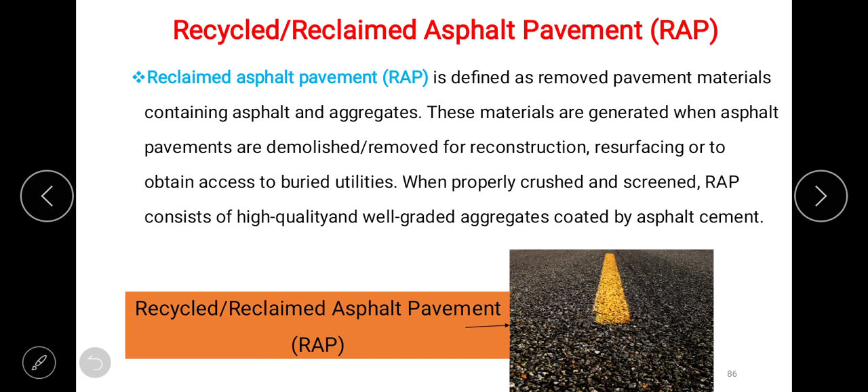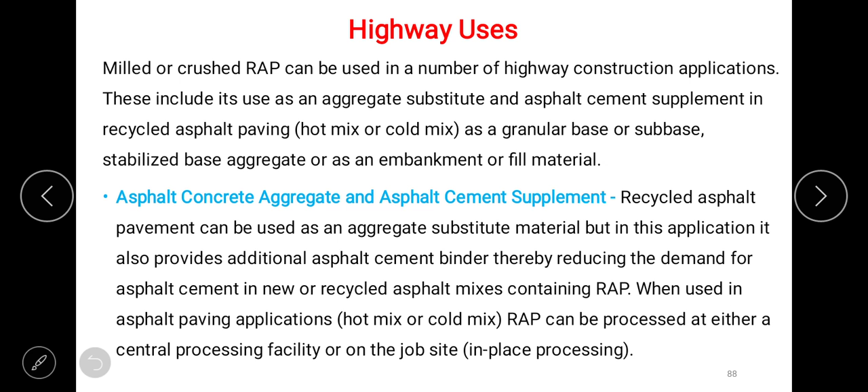In the last class, we have studied and understood what is RAP, recycled or reclaimed asphalt pavement. This is the one wherein the waste materials, that is bituminous concrete pavement or cement concrete pavement, when it comes for more maintenance, the whole slab is removed, that is demolished. The waste materials can also be reused in the construction, and how it is managed with current management options, recycling, disposal, and different highway uses, we have observed in the last class.

Today in this class we will see furthermore content. First of all, processing requirements. Hot mix asphalt, that is central processing facility. Recycled hot mix is normally produced at a central RAP processing facility which usually contains crushers, screening units, belt conveyors to convey the material, and stackers.

After it is crushed, then it should be stacked in the form of a heap. So if this pandemic disease comes to an end, then definitely you will be taken to a crushing plant, bituminous plant, etc. for site visit.

There, all processing steps, how it is processed, what are jaw crushers, primary crushers, secondary crushers, tertiary crushers, in order to get small sizes of aggregate for road construction, it will be possible for you to watch during site visit. Let us hope for the best. We will be getting that opportunity by the grace of Almighty God. So always we should think positive.

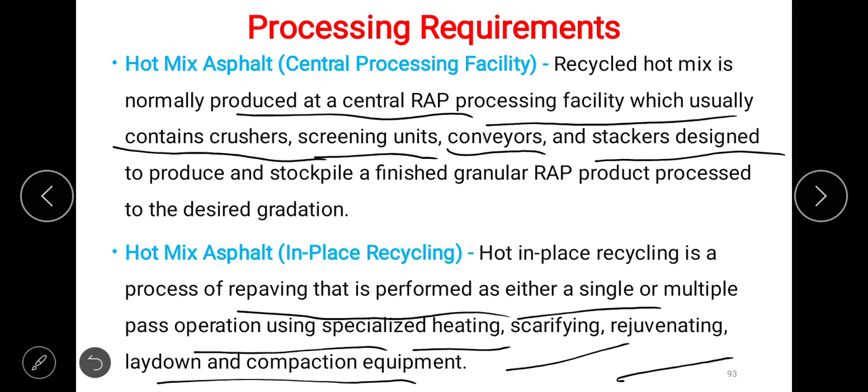Cold mix asphalt, central processing facility. The RAP processing requirements for cold mix recycling are similar to those for recycled hot mix, except that the graded RAP product is incorporated into cold mix asphalt paving mixtures as an aggregate substitute.

So instead of directly using the produced aggregates, we are going for waste material. After it is crushed in the central unit plant, it will be graded, means gradation is done, and then this graded RAP product is used. Thereby it can be considered as sustainable development. Sustainable means we can save or we can use this natural material for a longer period. That is known as sustainable development. You have studied in FE, BCE also.

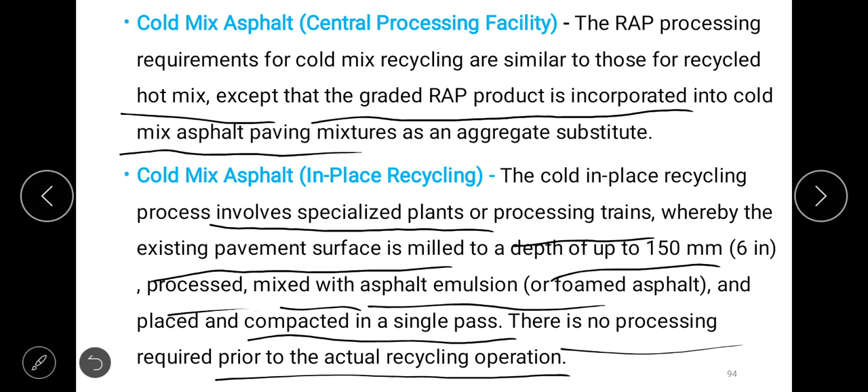Now, cold mix asphalt in place recycling. The cold in place recycling process involves specialized plants or processing trains whereby the existing pavement surface is milled to a depth up to 150 mm, that is 6 inches. It is removed, processed, mixed with asphalt emulsion or foamed asphalt and placed and compacted in a single pass. There is no processing required prior to the actual recycling operation.

Clear? Now, granular base aggregate. To produce a granular base or sub-base aggregate, RAP must be crushed. The removed or demolished pavement debris should be crushed first, and then it should be screened using different sieves. A set of sieves is established at the plant and blended with conventional granular aggregate or sometimes reclaimed concrete material.

Stabilized base aggregate. To produce a stabilized base or sub-base aggregate, RAP must also be crushed, screened, same procedure, then blended with one or more stabilization reagents so that the blended material with or when compacted will again gain the strength. Stabilized reagents like fly ash, brickbats, some other materials which could be used as stabilized agent which will gain good strength.

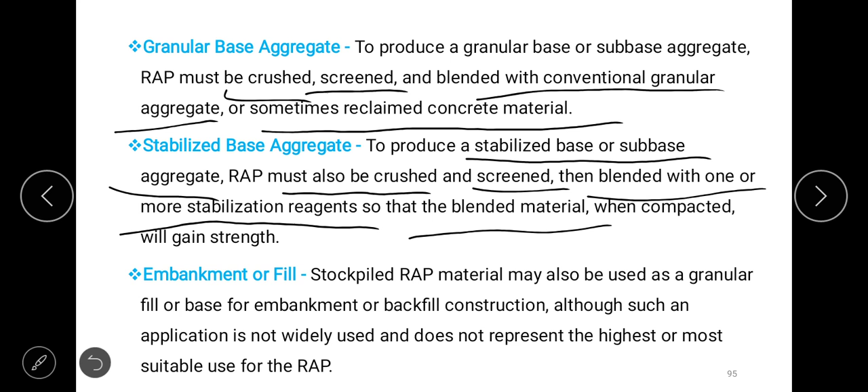Embankment or fill. Stockpiled RAP material may also be used as a granular fill or base for embankment or backfill construction. Although such an application is not widely being used and does not represent the highest or most suitable use for the RAP. More popularly it might not have been used, but nowadays, so as to conserve the natural resources, so as to show the sustainable development in each and every sector. You take plastic industry, whatever the waste of plastic that will be collected and recycled so as to make it reuse.

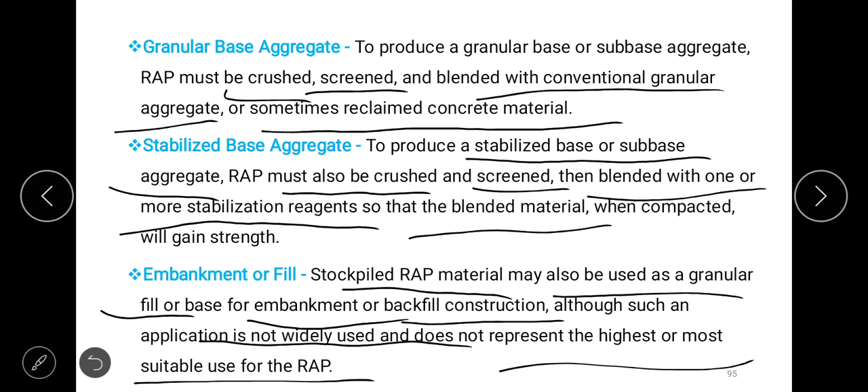Even plastics are used in road construction also. That is a waste material that can be used effectively when it is mixed with hot bitumen. Properties of bitumen material is enhanced, and when it is used in road construction, definitely it will become sustainable. This is reclaimed asphalt.

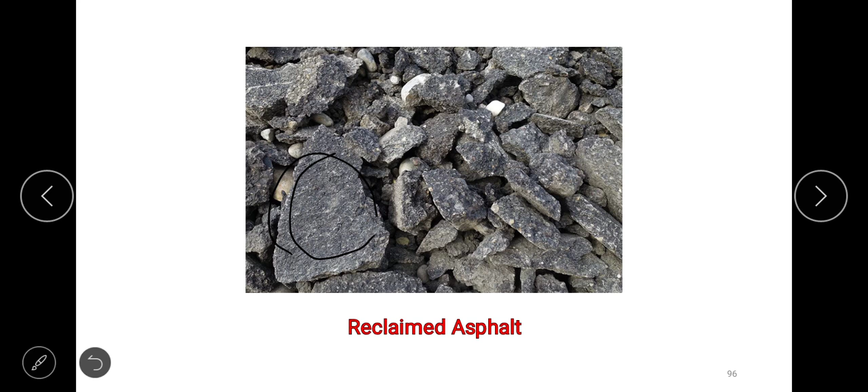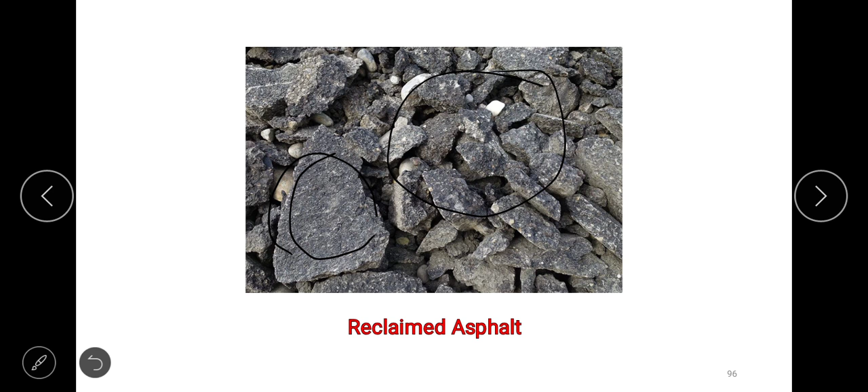How the debris is collected and shown in this photograph, you can understand. This is the pavement material which is removed from the location. Then these will be taken to the crushing plant or centralized plant as we have explained in the earlier slides, and it will be sieved through to get different sizes of aggregates for different purposes. Materials. Just let me zoom it.

Physical properties. The properties of RAP are largely dependent on the properties of the constituent materials and the type of asphalt concrete mix, that is wearing surface, binder course, etc. Depending upon different courses wherein this RAP material is to be used, the properties are also to be desirable.

Both milling and crushing can cause some aggregate degradation. The gradation of milled RAP is generally finer and more dense than that of the virgin aggregates. Crushing does not cause as much degradation as milling. Consequently, the gradation of crushed RAP is generally not as fine as milled RAP, but finer than virgin aggregates crushed with the same type of equipment.

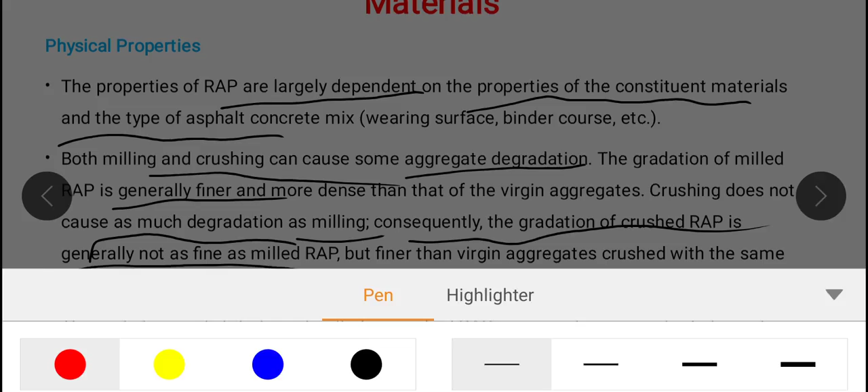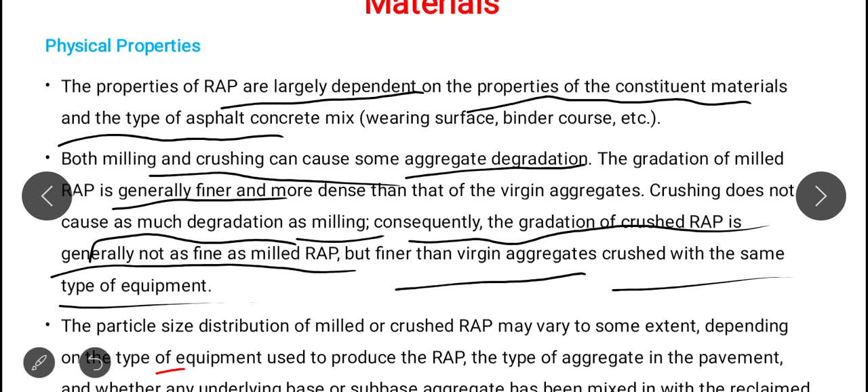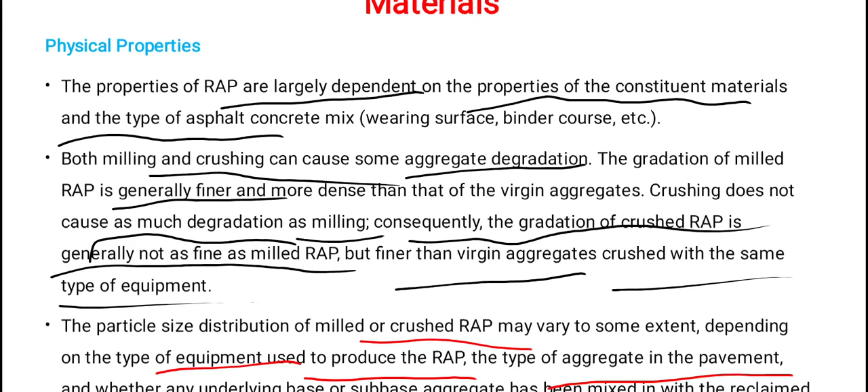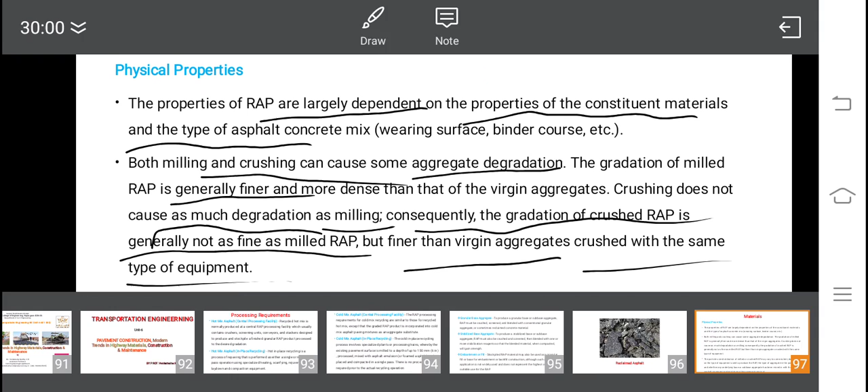The particle size distribution of milled or crushed RAP may vary to some extent depending on the type of equipment used to produce the RAP, the type of aggregate in the pavement, and whether any underlying base or sub-base aggregate has been mixed in with the reclaimed asphalt pavement material during the pavement removal.

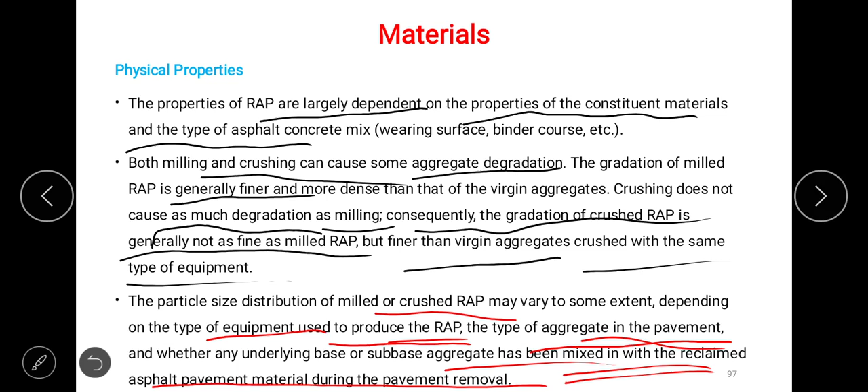That means the particle size distribution of milled or crushed RAP, reclaimed asphalt pavement material, may vary depending on the type of equipment used to produce the RAP. It depends on the equipment also, the type of aggregate used in the pavement, and whether any underlying base or sub-base aggregate has been mixed with the reclaimed asphalt pavement material during pavement removal. Have they got mixed up with each other from sub-base, base, etc.? These are also required to be looked into. That is the meaning of the statement.

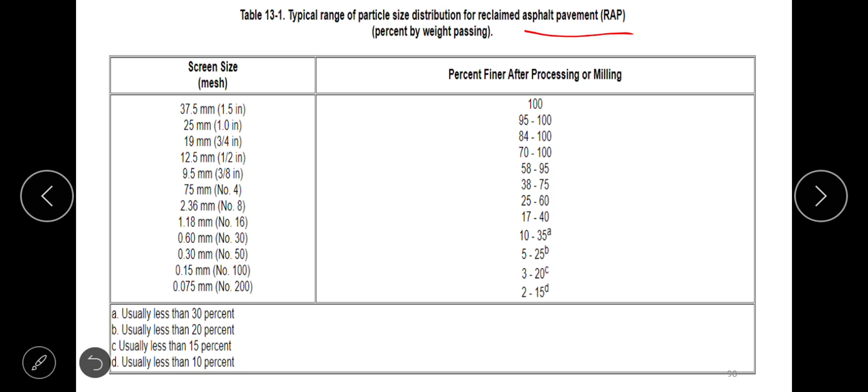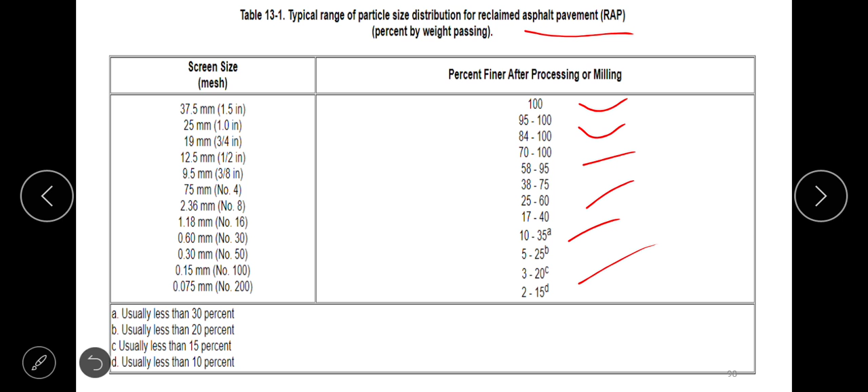Now, typical range of particle size distribution in reclaimed asphalt pavement, RAP percentage by weight passing: 37.5 mm, 25 mm, 18 or 19 mm, 12.5 mm, 9.5 or 10 mm, we can take round figures, etc. Percentage passing is also given. The first one, passing 37.5 mm, shall be 100%. The next size may be 95 to 100%. So likewise, the percentage of passing by each sieve mentioned is different.

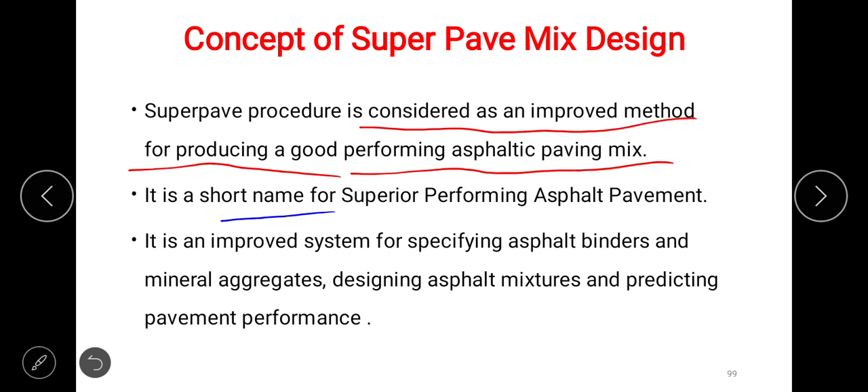Concept of super pave mix design. Super pave procedure is considered as an improved method for producing a good performing asphaltic paving mix. It is a short name for superior performing asphalt pavement. So super pave mix may also be understood as superior performing asphalt pavement. It is an improved system for specifying the asphalt binders and mineral aggregates, designing asphalt mixtures, and predicting pavement performance.

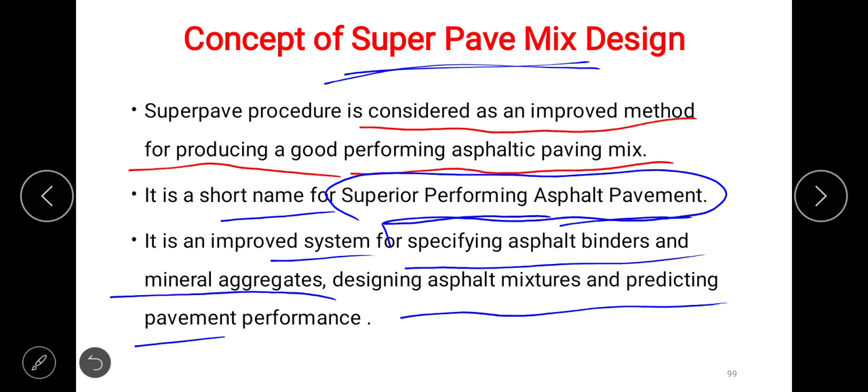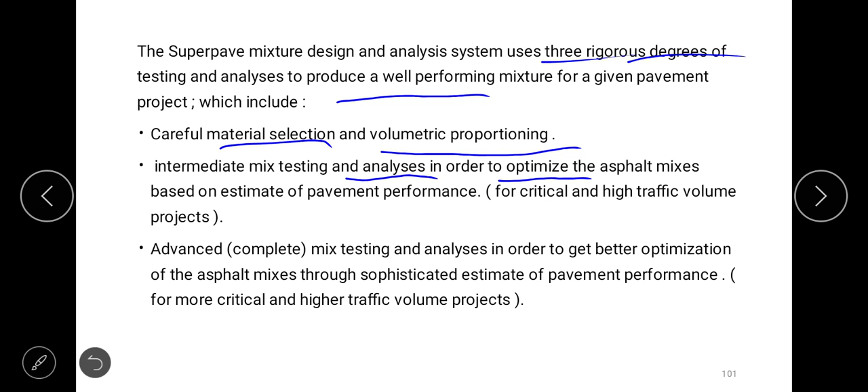Nothing much deep explanation is required. Carefully material should be selected and proper volumetric proportioning should be done. Intermediate mix testing and analysis in order to optimize the asphalt mixes based on estimate of pavement performance for critical and high traffic volume projects. It should be critically estimated for critical and high traffic volume, with respect to pavement performance.

Next point: advanced mix testing and analysis, in order to get better optimization of the asphalt mixes through sophisticated estimate of pavement performance for more critical and higher traffic volume projects.

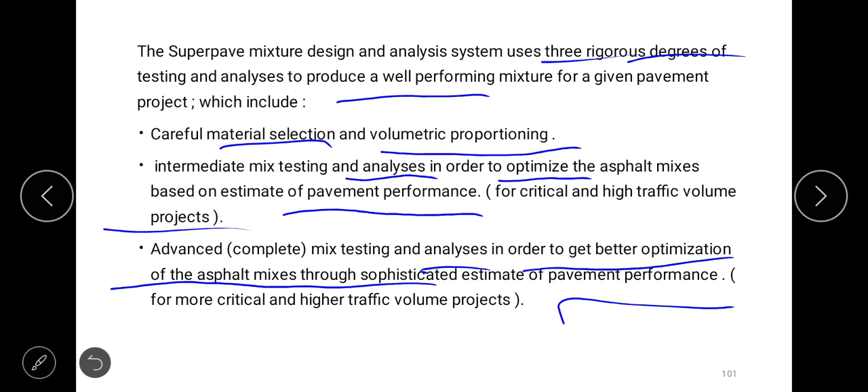Specially, objective of a mix design. The objective of a mix design is to select and proportion the mix materials to get an economical blend of a paving mix having certain desired properties over the service life of the pavement.

These desired properties include sufficient strength to resist the traffic loading without permanent deformation, sufficient flexibility to resist fatigue cracking. Third property could be good workability. You must have come across workability, that is slump, in second year itself, the minimum value of slump, etc. you must have already studied. So that indirectly dictates about fluidity.

During working, it should enable proper laydown and compaction. Why is good workability required? In order to enable proper laydown and compaction. Improper workability, a high value or lower value, will not allow for proper compaction.

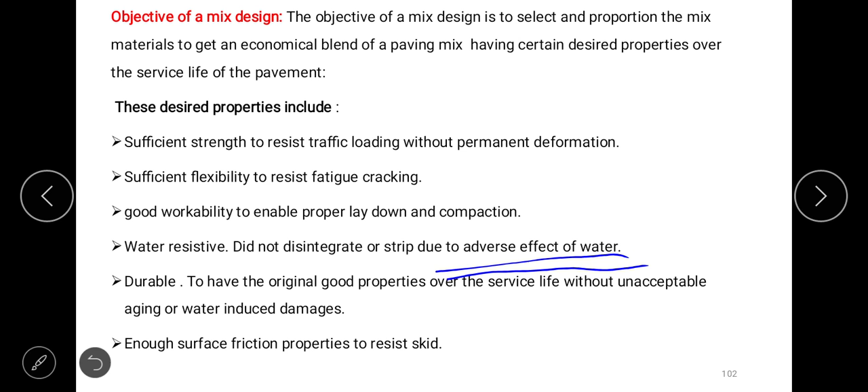Water resistive - it should not disintegrate or strip due to adverse effect of water. This should be seen, because when water comes in contact with bitumen, chances or probability of stripping out from the surface of the aggregate will be more. That should be taken care of. It should be durable, to have the original good properties over the service life, without unacceptable aging or water induced damages.

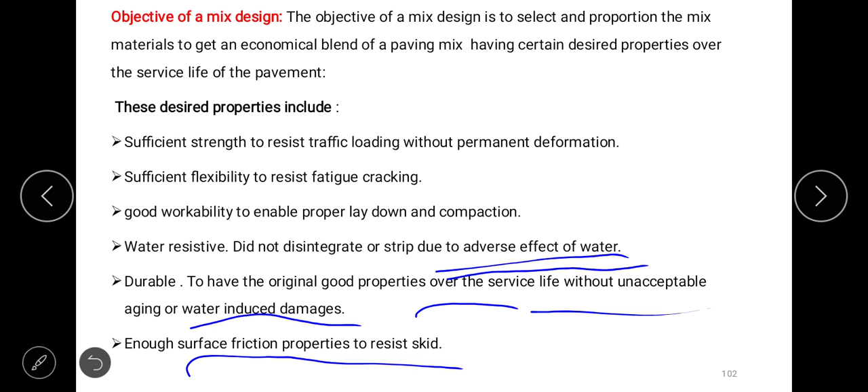Enough surface friction properties to resist skidding of the vehicle. The vehicle should not skid; for that, the surface should have enough friction properties.

To attain these desired properties, the asphalt mix composition should have sufficient quantity of asphalt binder to resist the adverse effect of water, but not high enough that it produces a weak strength. Second point: sufficient voids in mineral aggregate, VMA, to have enough spaces for asphalt to enable good aggregate coating and film thickness.

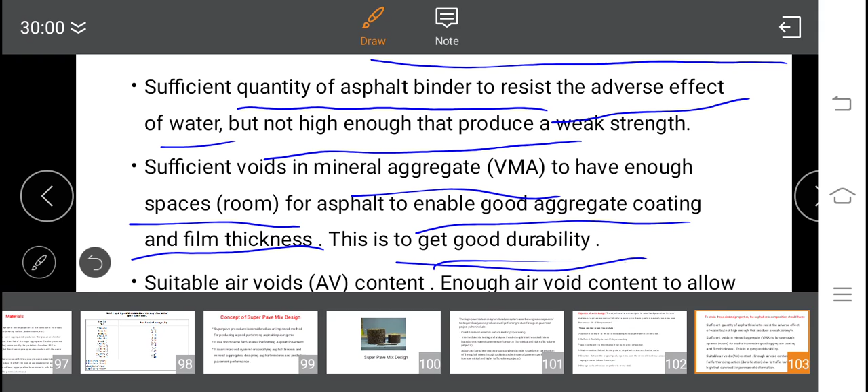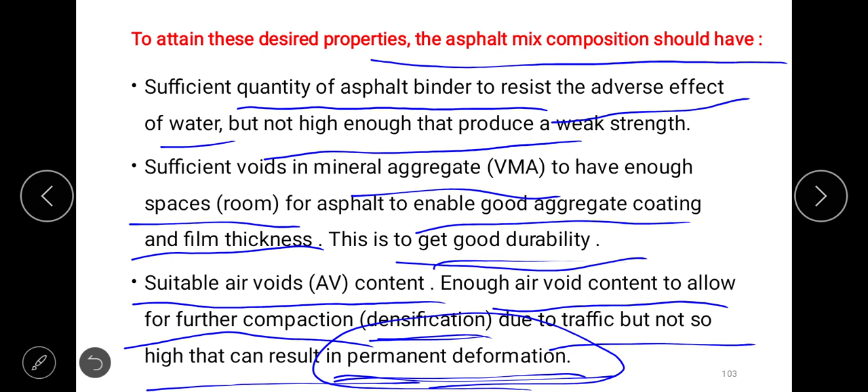Suitable air voids content: enough air void content should be allowed to permit further compaction, that is densification, due to traffic, but not so high that it can result in permanent deformation. So voids content should be allowed, but not to such an extent that heavy traffic movement causes permanent deformation. This permanent deformation should be avoided.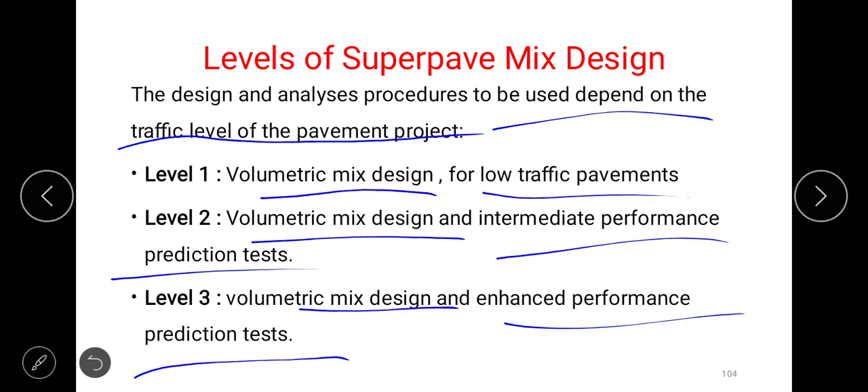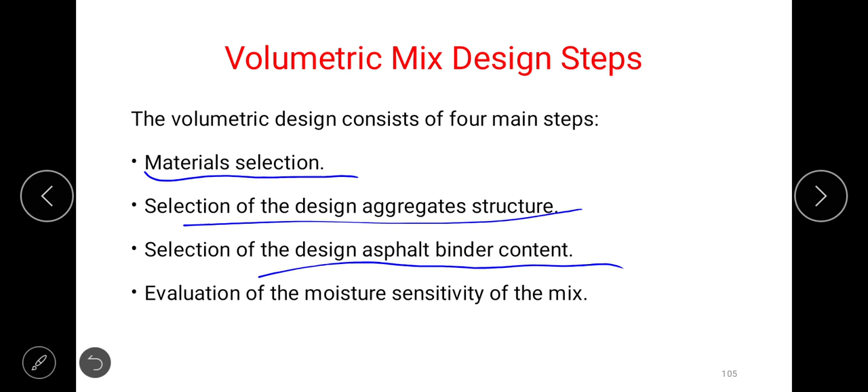Volumetric mix design steps: how this is done. First, select proper materials, selection of the design aggregate structure, selection of the design asphalt binder content, and evaluation of the moisture sensitivity of the mix.

Non-destructive evaluation of pavements using falling weight deflectometer, FWD. Sometimes even in exams abbreviations are given, so please practice and remember abbreviations for related content like falling weight deflectometer FWD, CBR California bearing ratio, SSD stopping sight distance, OSD overtaking sight distance. The falling weight deflectometer is non-destructive, meaning it causes no destruction to the pavement.

The behavior or characteristics of the pavement should be evaluated during maintenance work. It is a pavement loading device capable of exerting a load impulse similar in magnitude and duration to moving truck and aircraft wheel loads.

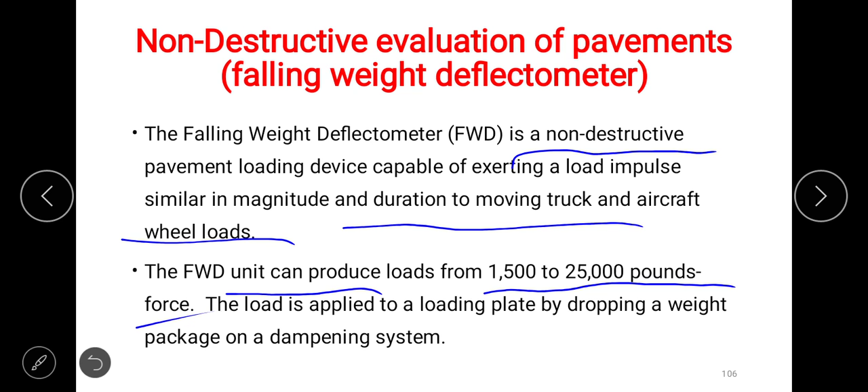The FWD unit can produce loads from 1500 to 25,000 pounds force; since this literature was obtained from the internet, the British unit is given. The load is applied to a loading plate by dropping a weight package onto a damping system.

Signals from the load cell and deflection sensors come under instrumentation. Such instruments designed for testing during the maintenance period of pavements are part of instrumentation; sensors etc. are used. The load cell is nothing but the device from which the applied load can be noted down directly.

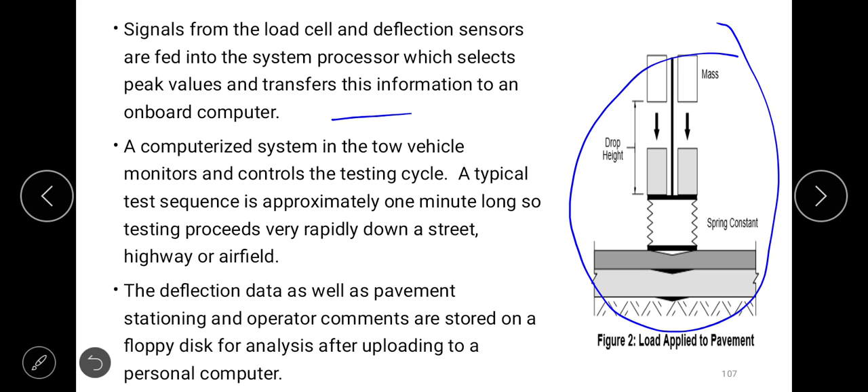Deflection sensors feed into the system processor, which selects peak values and transfers this information to an onboard computer, meaning this will be computed and the information sent to the PC.

A computerized system in the tow vehicle monitors and controls the process. Tow means the testing equipment is attached to the vehicle, which moves over the pavement longitudinally, since testing must be done at different frequent intervals, not at one single point. A typical test sequence is approximately one minute long, so testing proceeds very rapidly down the street, highway, or airfield.

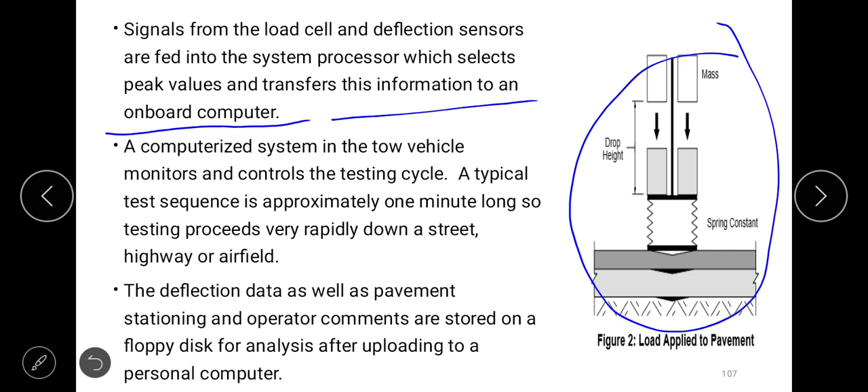The deflection data, along with pavement stationing and operator comments, are stored on a floppy disk for analysis after uploading to a personal computer. This means that during the test, the engineer's conversations etc. are also recorded, so that analysis becomes easier in the office.

This is one such falling weight deflectometer vehicle. The instrument is towed to this vehicle so it can be moved from place to place and testing carried out. It is connected to a computer unit embedded safely inside the vehicle.

It should be protected from sunlight and heavy wind, since these tests are performed in the field. In the field, there can be heavy wind blowing at high velocity that may disturb the working process during maintenance works. Therefore it should be properly housed with protection, rather than just embedded. Thereby the testing can be done comfortably and effectively. Whenever we do some work, we should try to make it more effective; then the results obtained will be optimized.

Is it clear from the photograph how the vehicle is set up, how the falling weight deflectometer instrument is towed to the vehicle, which in turn houses a computer system, so that all processing during the testing work can be saved in the PC and then analyzed to get results in the office?

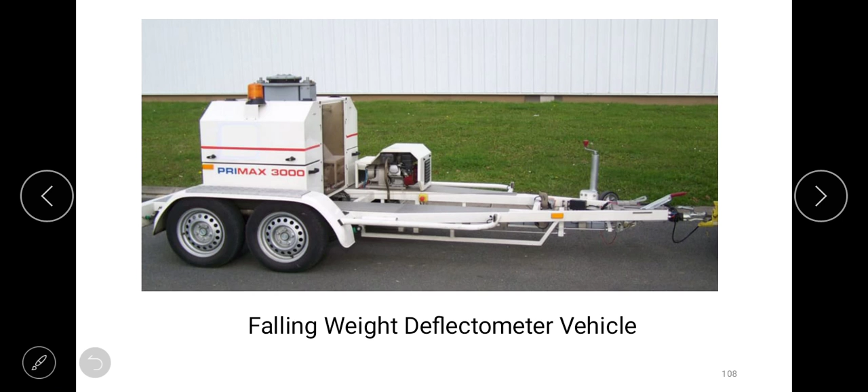Applications: in case of rigid pavements, locate areas of poor support beneath the jointed concrete pavements, and determine the load transfer across transverse and longitudinal joints.

See, suppose you consider the pavement this way, for example this is the longitudinal direction. If I take more width of the pavement, say 2 lane, 4 lane, etc., then concrete slabs are required to be cast: this is the first, this is the second, this is the third, this is the fourth, and so on. You can see between the two — let me take another color pen.

This portion in between the two slabs, in both longitudinal and transverse direction, is filled with sealed material. Water should not be ingressed into the pavement from the surface. For that purpose, high quality bituminous material or rubber seal is used. With bituminous material, it should be sealed properly.

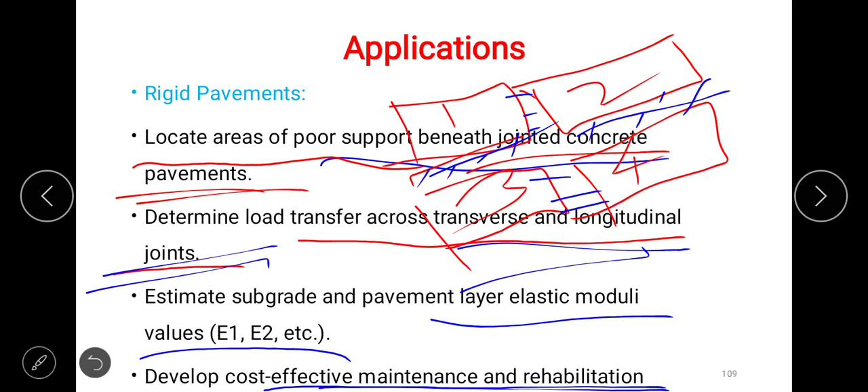Develop cost-effective maintenance and rehabilitation. In case of flexible pavement, determine the structural adequacy of a pavement and identify causes of failure. First we should know the various causes of failure, and accordingly the work shall be continued.

Determine uniformity of support along a project and identify weak areas. Estimate again subgrade and pavement layer elastic moduli values, say E1, E2, etc. If there are 3 to 4 layers, as usually used in flexible pavement, the modulus of elasticity of the material in each layer should be assessed, along with the elastic modulus value of subgrade material. Subgrade material ultimately is the soil.

In different layers we may not use aggregate. If there is shortage of aggregate in some location, and if the pavement is not so important because heavy trucks or heavy vehicular traffic movement may not be there, we may go for brick bats. That also has good properties possessed by natural or crushed aggregates. Therefore, elastic modulus of brick bats is entirely different than aggregates, so that is to be assessed.